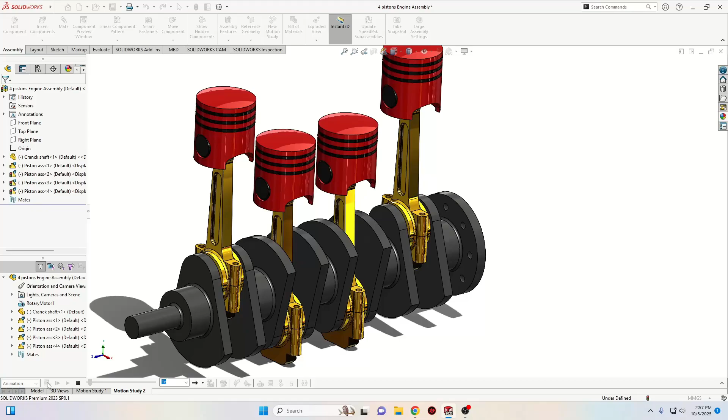My name is Alex and today we're gonna finish this 4-piston engine, and to do that first we'll have to make the assembly of the piston, and then we're gonna make the assembly of this crankshaft and all 4 pistons.

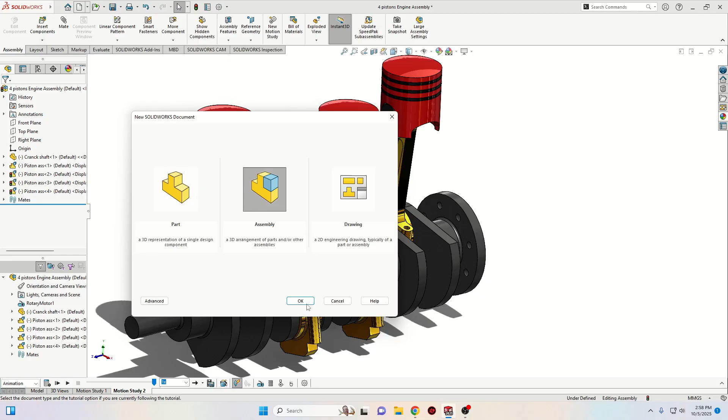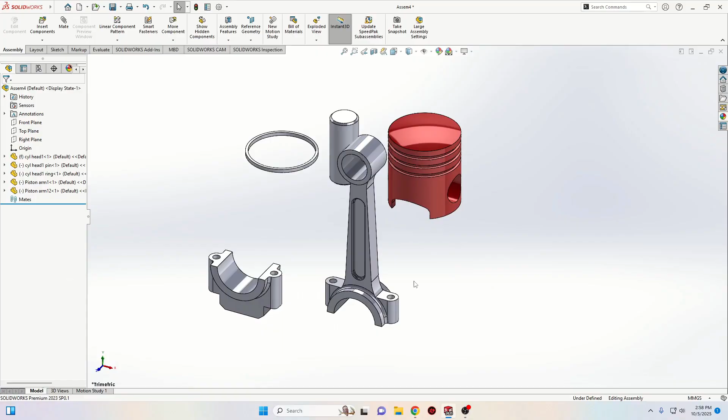So to do that, first let's open a new SolidWorks document, select here assembly, OK, and here let's go to browse for our parts. And without the crankshaft, select all of them. So you should have the cylinder head, this cylinder pin, this ring, and this piston arm. Okay, and now to assemble them, first let's make here plain white.

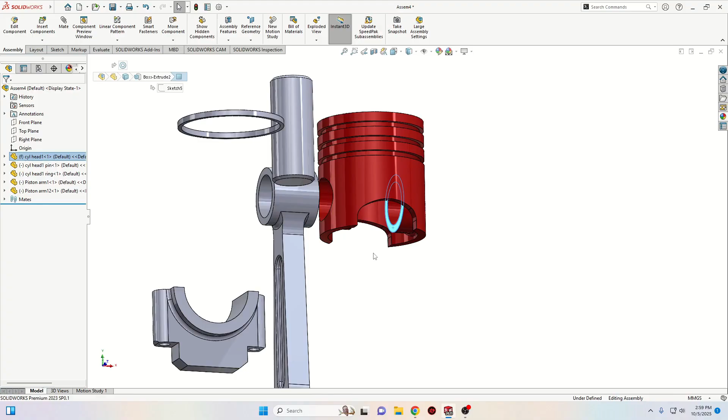Now to assemble them, we'll start with this face and this face. With Ctrl pressed, select them both and select here make concentric. And now we'll have to select this face with this one. So this one from the cylinder head with this one, and select here coincide.

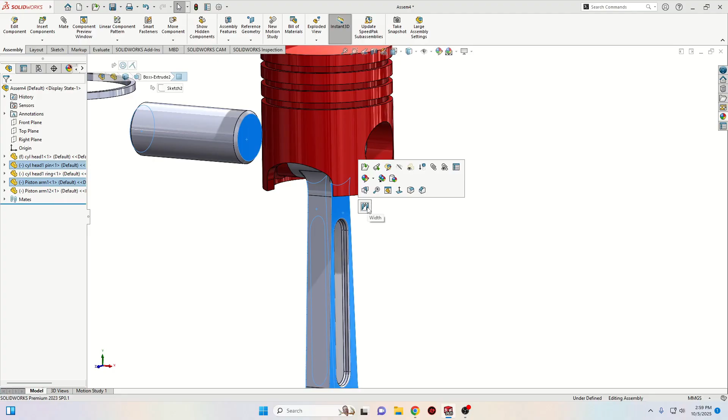And now let's insert this pin, so select this face from the pin with this one, select here concentric. And now select this face, and with Ctrl pressed we'll select this one also. And then also with Ctrl pressed we'll have to select these other two. And select here this mate width. And now this will be just in the middle. And now let's insert this ring.

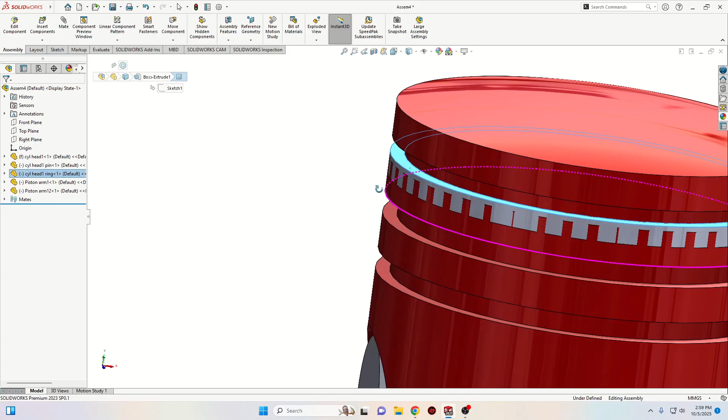So first we'll select this face with this one, select here concentric, and then let's move it a little bit up. Select this face with this one, select here coincide. Okay, now we need 2 more of these. So we'll go to linear component pattern.

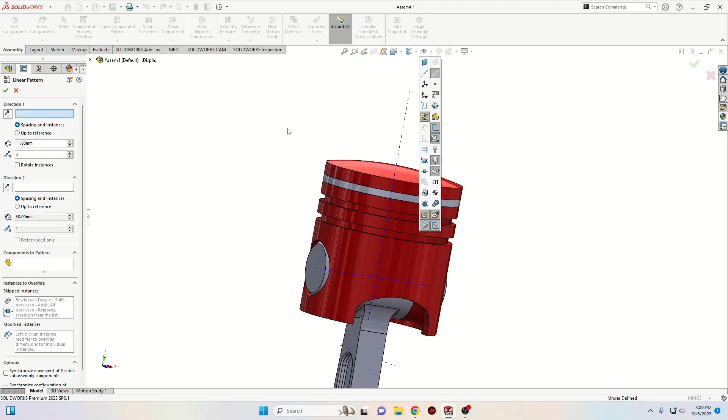We'll select the direction. To select the direction first, let's go up here to visibility and select this one, view temporary axis, and we can see this axis from the cylinder head. As the direction, we're gonna select this axis. Okay, spacing and instances, and the distance between these will be 11.6, and we'll have 3 instances.

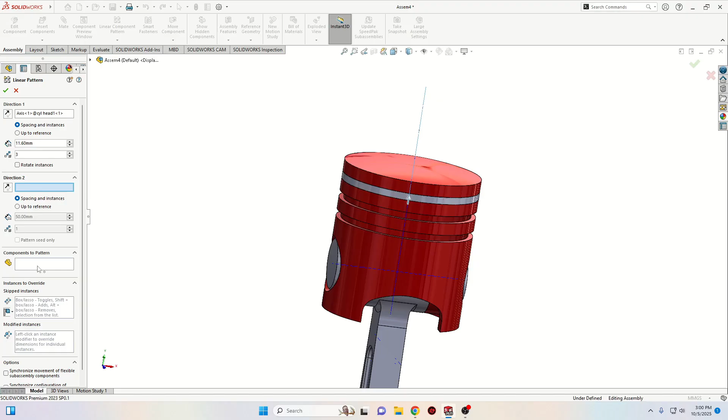That is good. Now we'll go down here to components to pattern, and we'll have to select this ring. Now we need it to go down, so we'll have to reverse here the direction. Now as we can see, it's fitting in these slots. Press OK. And now this is looking good. Now we can hide this axis.

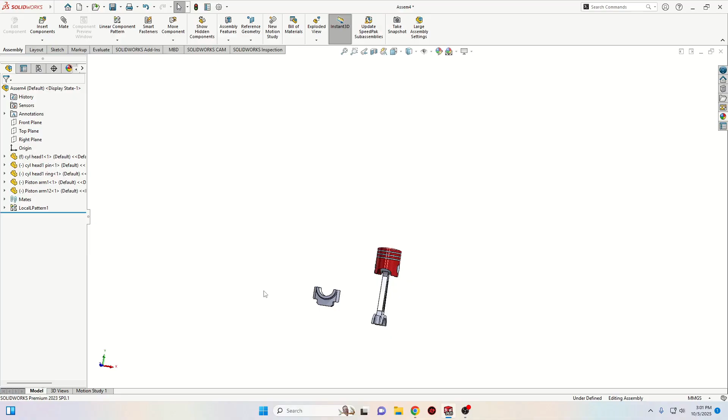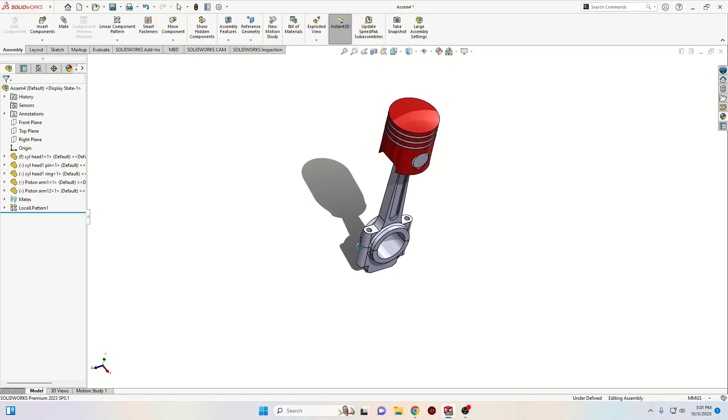Now let's finish the assembly. So select this face with this one, select here coincident, and select this one, select here concentric, and this one with this one should be also concentric. Now this is the piston. Let's save it because we're gonna need it in a second. Piston.

Okay, save. And now let's open a new SolidWorks document, also assembly. Okay, and let's insert the last assembly with the crankshaft. So piston with the crankshaft. You have to select them with Ctrl pressed and select here open. Now let's insert them. Let's make this plane white.

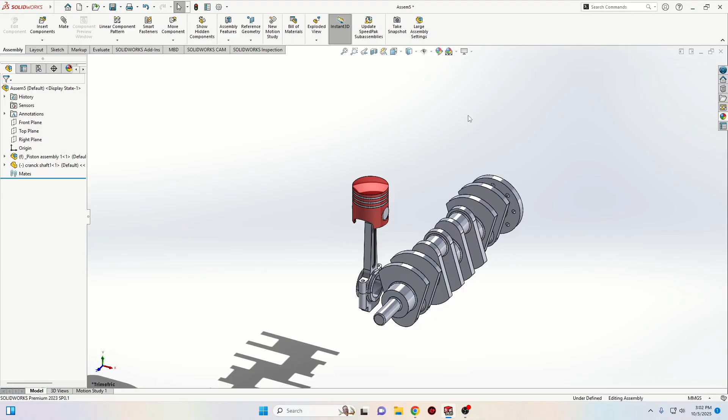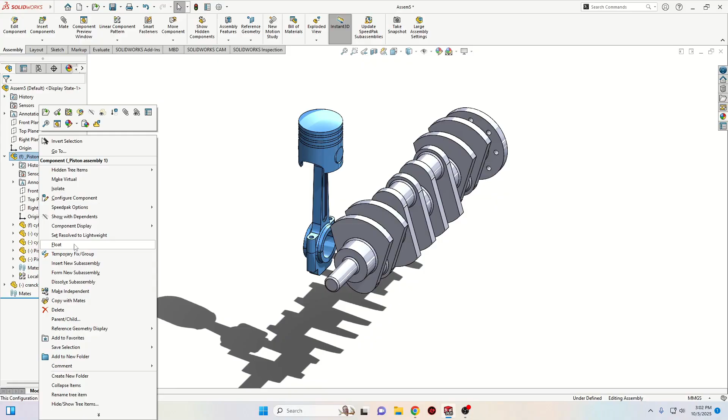Okay, now this one, the first component that you insert is gonna be fixed, so we'll have to make it float. Right click on it and select here, somewhere around here actually. No, we'll have to go here on the left to piston assembly, right click on it and select here float, because this is already an assembly. If you click on this one, it will only take the component, not the whole assembly.

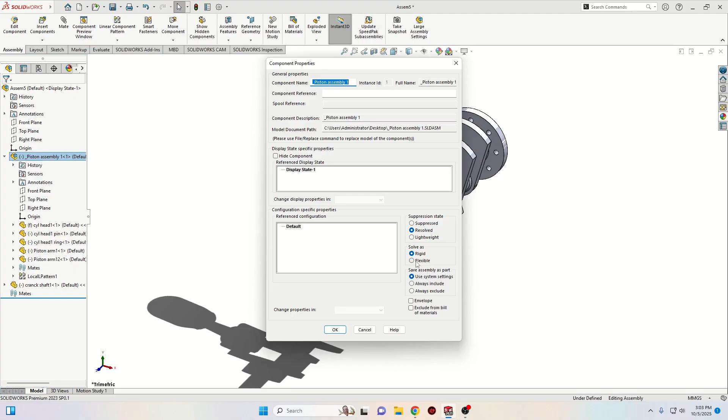Right, and we'll have to do one more thing for this piston. Right click on it here on the left, and we'll go to component properties, click on it and select here flexible, because we're gonna need the cylinder head to move according to the movement of the crankshaft. So select here flexible and OK. And now we'll see in a second that the head will move how it should.

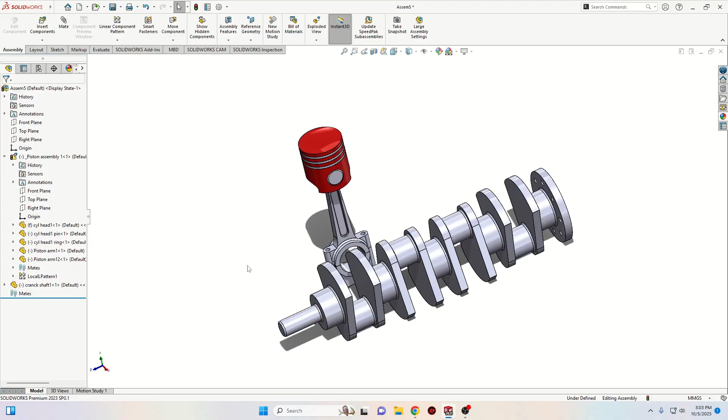Alright, and now this is moving. Let's make it fixed, but not totally fixed, only to be able to rotate it. Maybe there is an easier way, but this is how I'm going to do it. First, let's make the temporary axes so you can see them again. And then let's select this face.

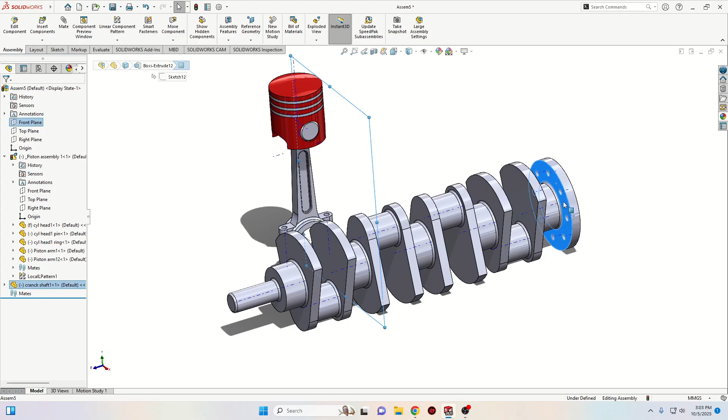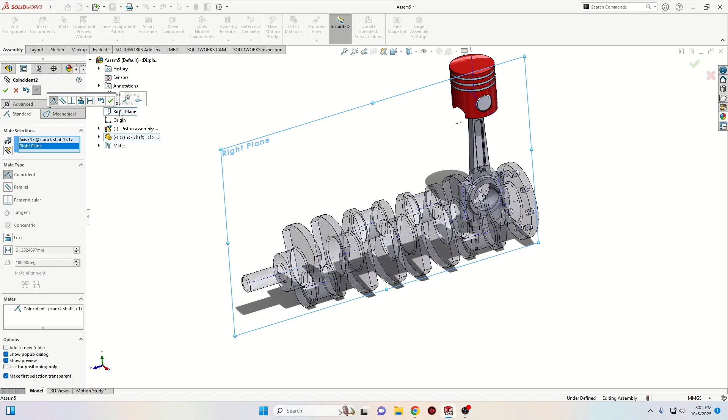With Control pressed, we'll select front plane, because this plane is, in my case, the one parallel with this face. And select here mate. And it should coincide. Press OK. And now the next thing that we're gonna do will be to select this axis with right plane, and it should also coincide.

Press OK. Now we'll have to do one more thing. Select this axis with the other plane, which is top plane, and it should also coincide. Press OK and OK. And now this crankshaft is only going to rotate, not moving in other directions.

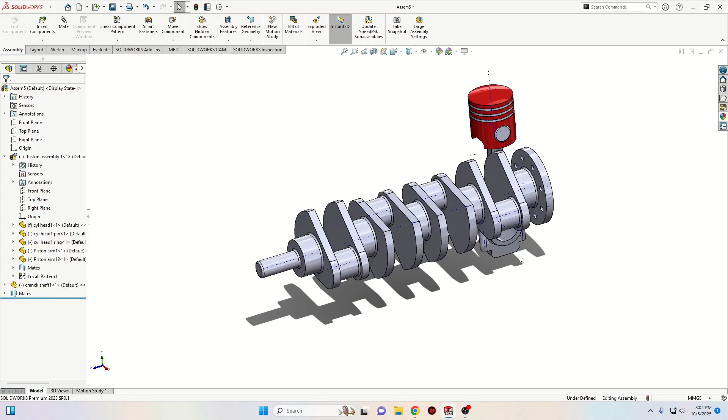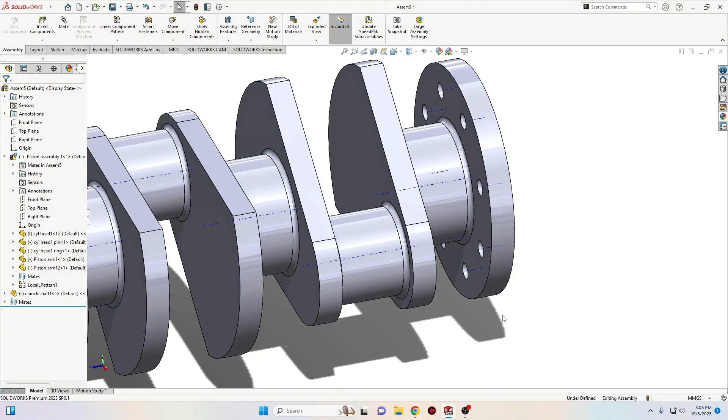Now let's select this face with this one and select here concentric. And now we need to position it right here. With Control pressed, select this face with this one, and then this one with this one, and select here width. OK. Now we have our first cylinder, our first piston, it's right here. Now let's see how it's moving.

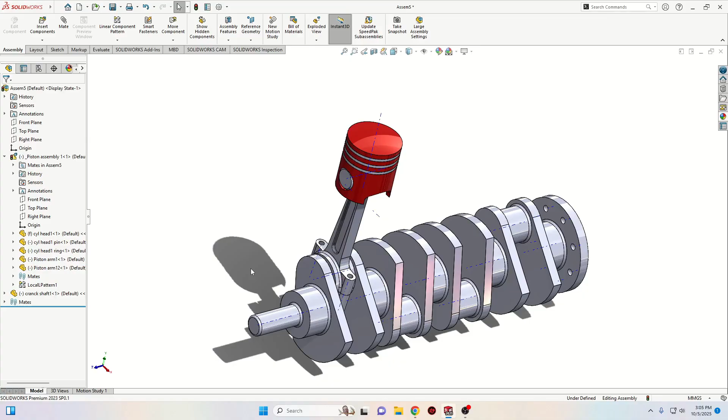When we rotate this, we can see that the head is also moving strange. What we'll have to do is to select this axis with the right plane in my case, and we'll select here coincide. Okay. Something is strange when I add these mates. And now let's try again. When we are rotating, we can see that the head is staying still, only moving up and down. This is what we want.

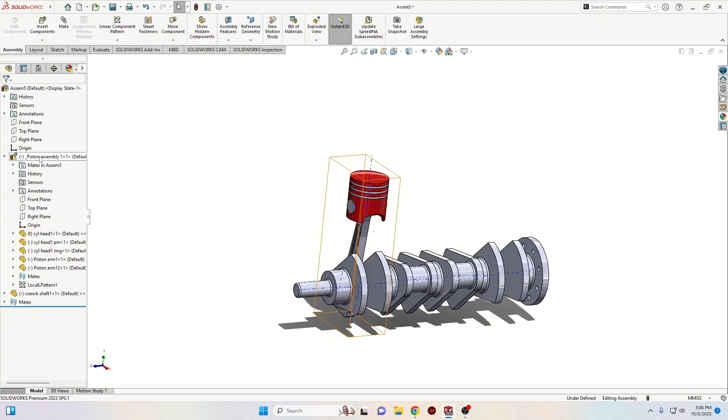Now we need 3 more of these. So with Control pressed, from the feature tree, we'll have to click and drag the piston assembly one by one until we have 4 of them. Now that we have 4 of them, let's assemble them the same way we did with this one. First, this face with this one, concentric,

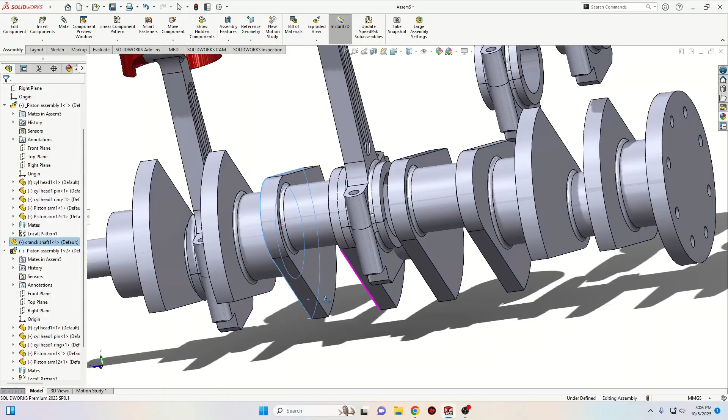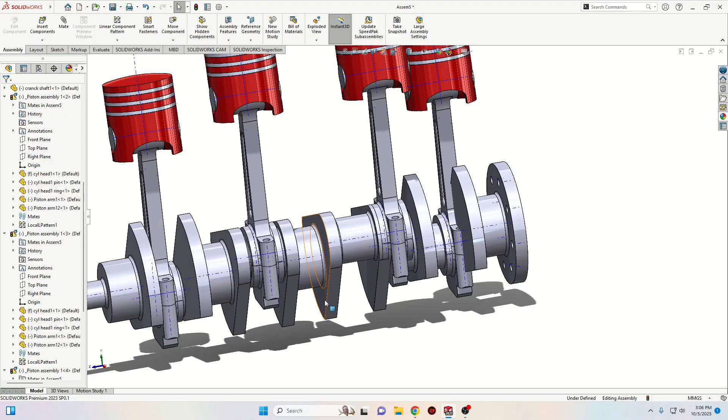and then this with this, with this, with this, should add the width mate. Now we have one more, and let's do the same for these other two. Okay, and the last, concentric. And now let's add the width mate. Place it into the right position. Let's do the same for the last one.

Alright, and now what we'll have to do is to make these 3 axes also coincide with the right plane in my case. So select right plane, this axis, coincide. Okay, and apparently we're going to do this for all of them. And then this axis with right plane, coincide. And then this axis with right plane and coincide.

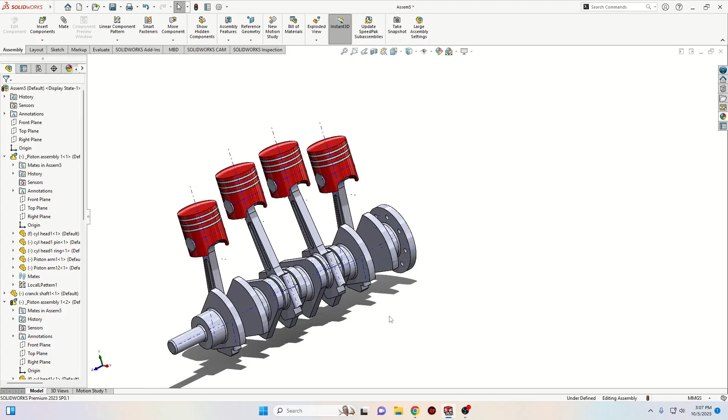Alright, and now these pistons should be all aligned. Let's hide these temporary axes and let's try to rotate this crankshaft. As we can see, it's working pretty well.

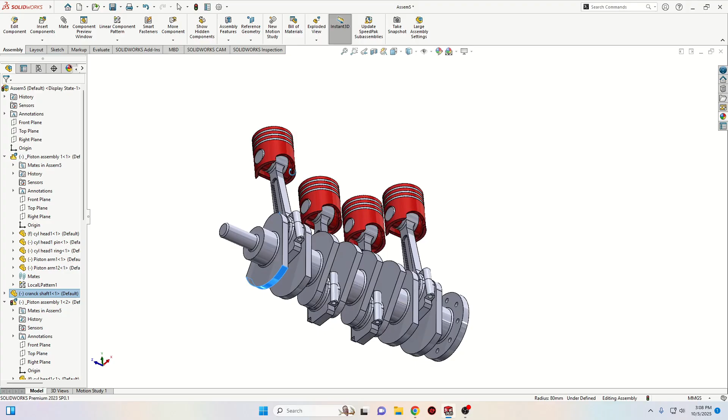Now, one more thing that we should be doing is to add here some bolts to keep this in place, because in reality it's not going to stay like this. To do this, we can go to the library, because on the drawing there were no bolts or something like that. I'm not going to do that because it's already a basic thing, so you can do it by yourself if you want. This was the tutorial for today.